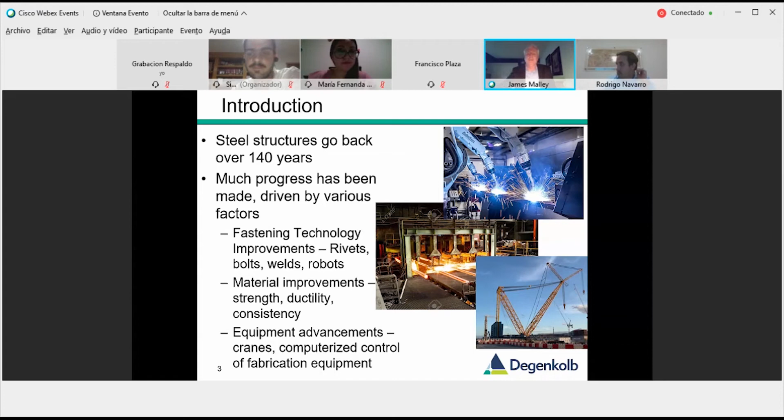And then there's equipment advances - I put a picture of a crane there. It's interesting how important the crane is to how the building gets built, and really it should be considered in how we design structures. Working with the contractor on the equipment they'll have access to on the project is also quite important.

Okay, so where can innovation occur? I mentioned 5 areas, so we'll jump right into the first one, which is architectural forms and design. Obviously architects are getting more and more ambitious.

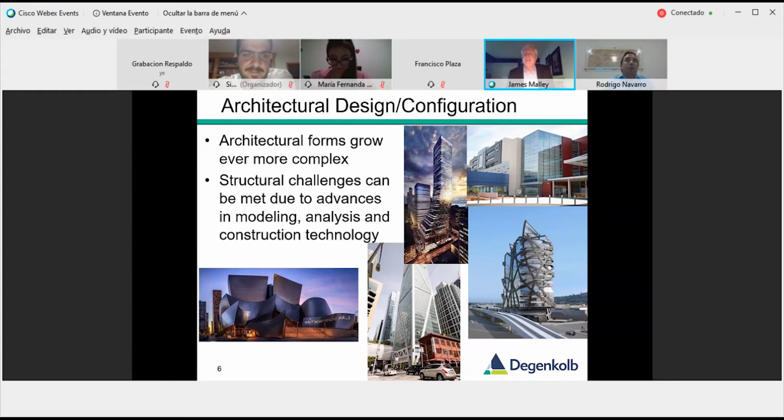A VA project that I designed will be the next slide - we'll talk about that as far as configuration issues. And then finally, a project that I'll talk about in one of my peer reviews at the end of the presentation.

So the VA hospital that we designed in Las Vegas is one building, one very large building, almost 1 million square feet. But it had various story heights or numbers of stories. The darker green sections were 2 one-story buildings, orange are 2 three-story structures, and then a seven-story structure in the middle.

If we had tried to tie this entire facility into one building or one structure, it would have been very complicated to design the lateral, the seismic system for that kind of building. So what we decided to do instead was to break it up into smaller, regular, rectangular shaped structures.

In the boxes here, hopefully you can see my cursor - you can see dark dotted lines where we broke the building up. So the intent there is that each of those act as individual structures.

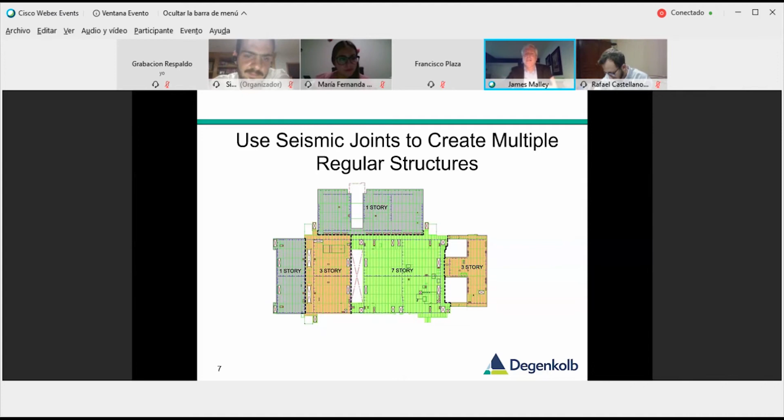So when the earthquake hits, here's a simulated earthquake for you, you can see the buildings will respond to the earthquake on their own and hopefully have much better performance overall.

So let's talk about systems. In our US building code, we have, believe it or not, 82 different structural systems listed - concrete, steel, wood, masonry, all kinds of different configurations and types. There's a lot to choose from. Really only a handful are used on major structures at the present time.

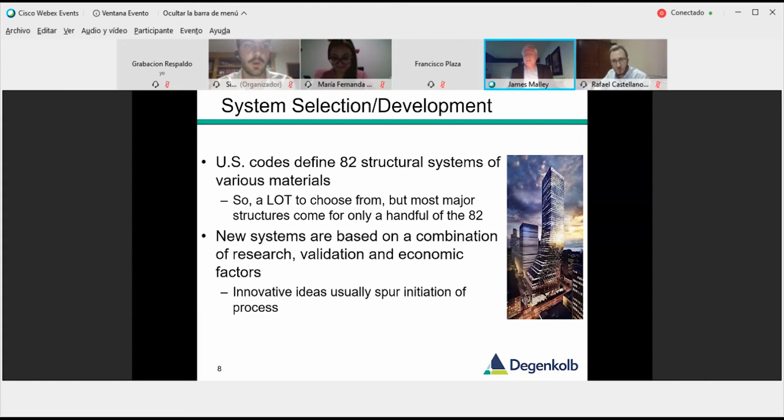So new systems are really based on a combination of research and validation through analysis techniques, and economic factors drive new systems. Engineers will come up with an idea, and it may lead to a new system eventually ending up in the building code.

So I'm going to talk about some of the more recent code systems that have been developed and added in the steel area. The first one is what we call steel plate shear walls. This concept was originally developed in Canada, and we have some Canadian engineers working on our committees who brought this forward to us to start to develop that system in the US.

So the idea is essentially to put a thin steel plate in the boundaries between beams and columns in a steel frame, and then it acts sort of like a shear wall, like we usually would think of in reinforced concrete, that can generate a tremendous amount of strength.

This is a test, a picture on the right at the end of a test at UC Berkeley years ago. You can see that the plate itself, being very thin, will buckle during the seismic response and orient itself in what we call tension field action, depending on the direction of the lateral load. It can be a very effective system.

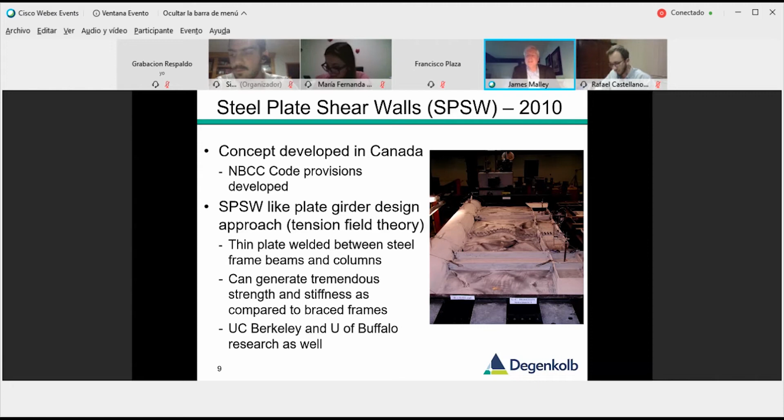I'll show you an example of one of those on a large project in Los Angeles later in the talk.

So designing those systems, usually it really is just a free body diagram for those of you in the audience - you can design all the elements to deliver the forces between the plate element in the middle and the columns on each side and the beams above and below. You can basically walk your way through the design of the building in that fashion.

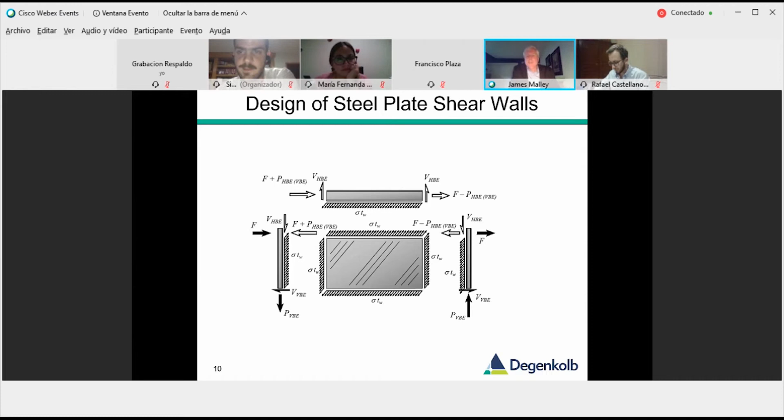One of the things we found in designing these steel plate shear wall buildings is that the plate thickness available to us just goes in steps, if you will. You might have a 1 centimeter plate, then a 2 centimeter plate, and a 3 centimeter plate available to you. Very often the plate thicknesses do not have to be very large - 2 centimeters is actually quite a large thickness for these plates.

The strength of the plate is obviously proportional to the thickness of the plate. So what we found was that when you design this system using solid panels, it can create very large additional demands on the columns in the building and the foundations. So some researchers developed an idea to put holes in the plate to reduce the capacity and tune it better to what the seismic demand on the entire building would be. This is an approach that's also available to us on steel plate shear wall design.

Another kind of system that we work with are composite systems, and I call it the best of both worlds, because we can use the steel where it is most effective - in tension or in shear, where steel is very ductile and has good strength - and then the concrete, primarily in compression, where concrete is really efficient.

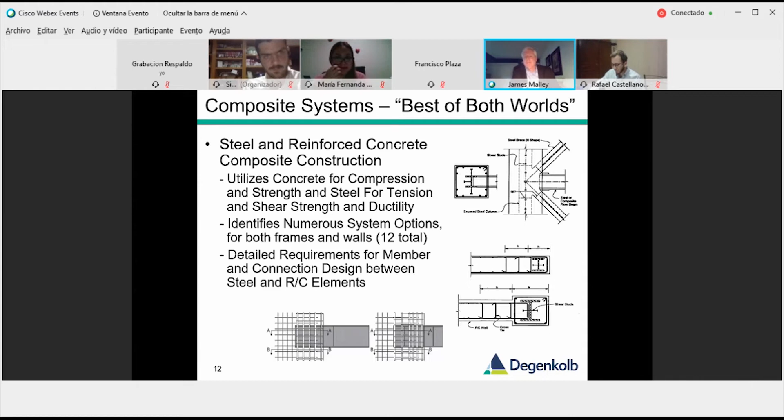So there are numerous options of that system. You can see some examples here where on the upper right, you've got a braced frame configuration where the braces and beams are structural steel and the columns would be a composite element between concrete and steel. At the bottom, imagine a concrete shear wall where you would have coupling beams between the wall piers, using a steel coupling member instead of a reinforced concrete coupling beam.

One of the very new systems developed in the US is called a composite sandwich wall. The AISC has dubbed this SpeedCore. If you wanted to Google SpeedCore, you would find a lot of information on this. This system was originally developed for the nuclear power industry in the US as a modular type system, but it's been passed over to traditional buildings as well.

The idea is basically to use steel plates, you can see at the bottom in the middle there, and then inside the steel box, pour concrete - not reinforced concrete. There's no reinforcing bars in these walls. There are tie bars, which you can kind of see in the picture at the bottom, closely spaced, usually on the order of 1 foot, about 0.3 meters, in both directions to keep the wall plates together. That acts as your shear wall.

Where we've seen this as potentially applicable is to replace reinforced concrete core walls in tall buildings, where traditionally the architecture or design would want steel framing for the floors, beams and columns, but then use concrete shear walls around the elevator shafts and stairs at the center of the building, for example in an office space. With SpeedCore, we can avoid the interaction between the concrete elements in the core and the steel elements, and just make it basically an all steel building.

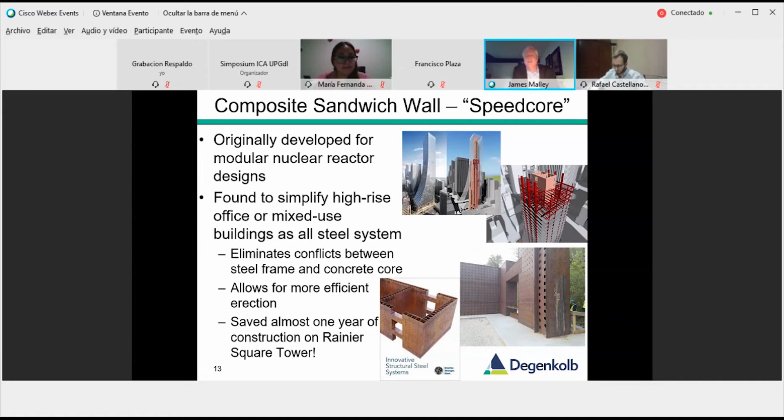That has some real advantages for speed, and that's why they call it speed core. On this example project done in Seattle, which I'll talk about a little later, they were able to save almost one year in construction out of a 3-year process. So it's very significant how fast they could build the tower. AISC is really pushing this forward for some of these larger projects. So that's kind of where we're at on some of the more innovative systems today.

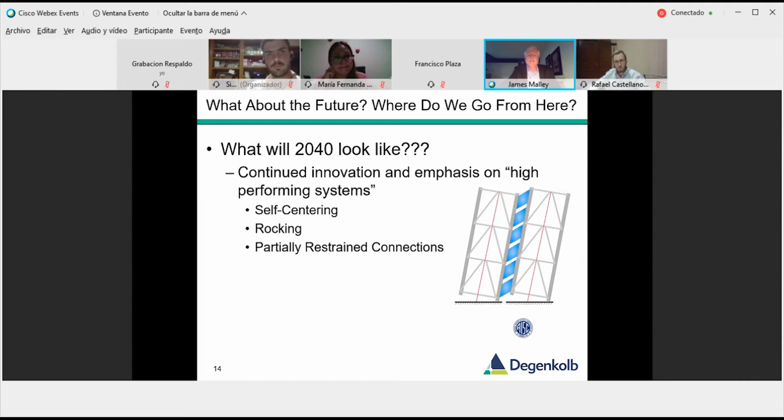But what do we think we're going to see over the next maybe say 20 years in steel? One idea that has come forward concerns how in our typical structural designs of all types, there's no real code requirement about making sure that at the end of the earthquake, the building has come back to plumb - straight up and down. Potentially you could end up with a building that's leaning after the earthquake, which would be very difficult to repair, so it might have to be torn down. So there's been movement in the profession to try and develop systems that are self-centering.

In our gravity systems, gravity will help to potentially self-center, but if we get very large earthquakes, it may not be able to do the total job. So what these self-centering systems use are post-tensioning, in most cases, to basically pull the building back to plumb and vertical. In the upper right, you can see a brace frame example with vertical post-tensioning between the red bracing on either side of the center of the system, in this area here and here.

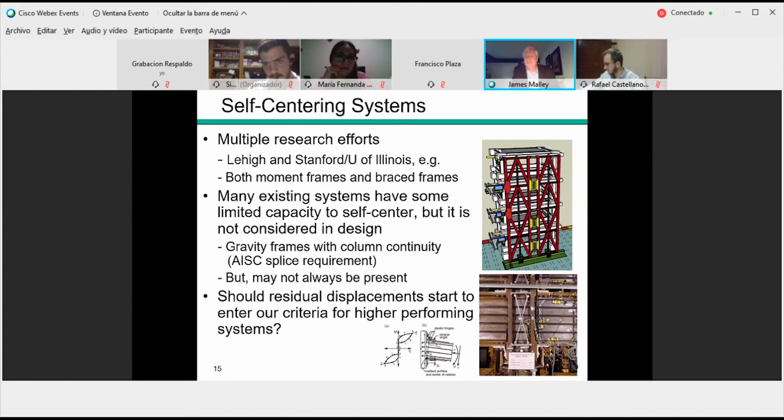So that's an element, a way to self-center. On the bottom part of the system is a moment frame system where we've got horizontal post-tensioning bars, again, that will do that pulling back or recentering the building after a major earthquake.

Another approach, which is a little less direct, is a rocking system. This has actually been studied for many years. There were tests done back in the 70s on a shaking table, where a steel building was placed without any connection to the table and allowed to bounce around and rock. You can imagine there is stability in the system just from the gravity that goes on. But really we don't have any rules in the code about how to do that. There's some work going on to try and develop those.

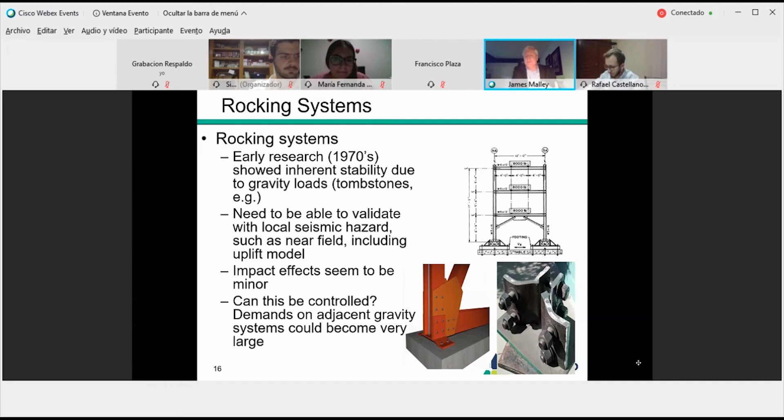Some engineers have been using systems like in the little graphics at the bottom there, with a piece of angle that's bolted to the foundation and then bolted into the braced frame, allowing those angles to rock, or the building to rock up off of those angles. But we really need to control that. So there's more work that needs to go on before something like this would be codified in any sort of fashion.

So the next step is partially restrained moment frames. That system isn't used very often in modern practice. Usually with our seismic systems, we want the connections to be stronger than the members, and don't want to get the ductility out of the system in the connections. But in the partially restrained design approach, we actually want the connections to be yielding, and we have to make sure we control the failure mechanism to be a yielding mechanism.

Okay, so we'll move on now to high performance products. Generally our building codes focus on life safety, with only limited emphasis on functionality and repairability after major earthquakes, except for critical post-earthquake facilities such as hospitals, which we really want to make sure are occupiable after an earthquake. Some owners are interested in making sure their buildings are functional or have limited damage after an earthquake - think about data centers, critical manufacturing facilities, or museums. Museums are an interesting case because the contents are potentially so fragile and expensive, billions of dollars, that making sure that building has limited damage and shaking is very important to protect the contents.

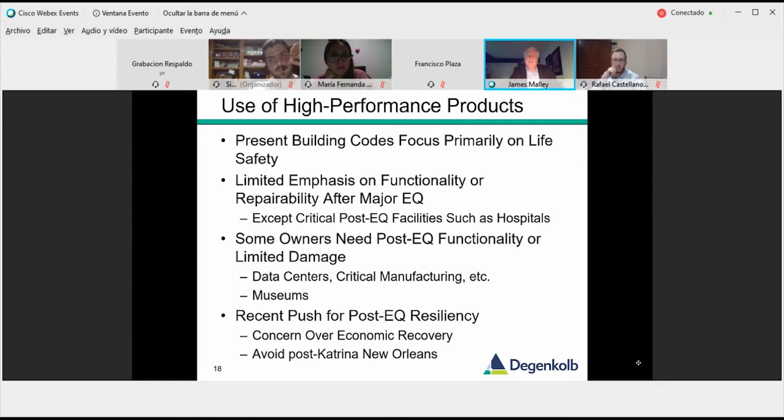In California, we've been talking about what we call post-earthquake resiliency recently, where we want to make sure our regions, if subjected to a major earthquake, will be resilient, and there won't be a disaster like which occurred in New Orleans after the Katrina hurricane. So that's another area where we might want to look at using high performance products.

Those generally are a couple of different things that we use: seismic isolation and damping. We call this response modification. Basically, those types of elements change the response of the building so that it reduces the demand on the rest of the structure, limiting any kind of damage that might occur, and dissipating the energy of the earthquake, taking the demands out of the primary structure.

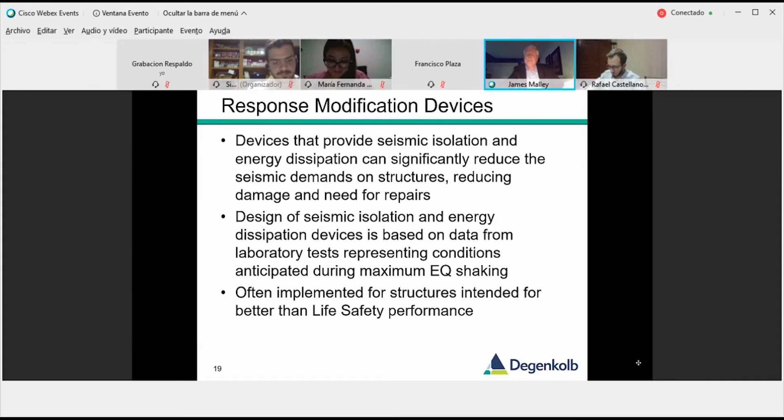Both of those require us to have a lot of data and information, laboratory testing on those special elements or devices. We really need to have a good representation of what we think the maximum earthquake shaking that's going to occur in those buildings might be. Usually, these would be implemented when we're going potentially beyond the code minimum or just life safety performance.

So an example of seismic isolation here. As we know, the ground shakes. If the building is attached rigidly to the ground, it has to take the motions of the ground. But if you isolate it, the ground moves, and essentially the building stays in place. A friction pendulum isolator is a very common system for seismic isolation.

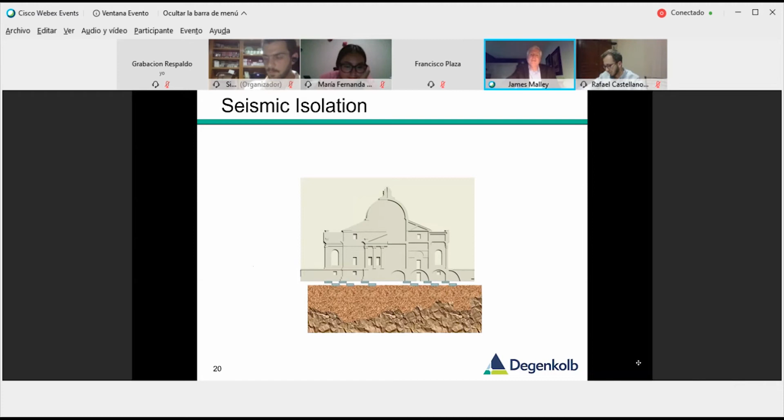So we'll talk about damping. You can get very good performance for high performing buildings out of dampers. It helps to reduce accelerations, to protect the contents, maybe not as much as base isolation does though. The cost increases are fairly moderate, a few percent of construction costs potentially, and it's actually getting pretty widespread application.

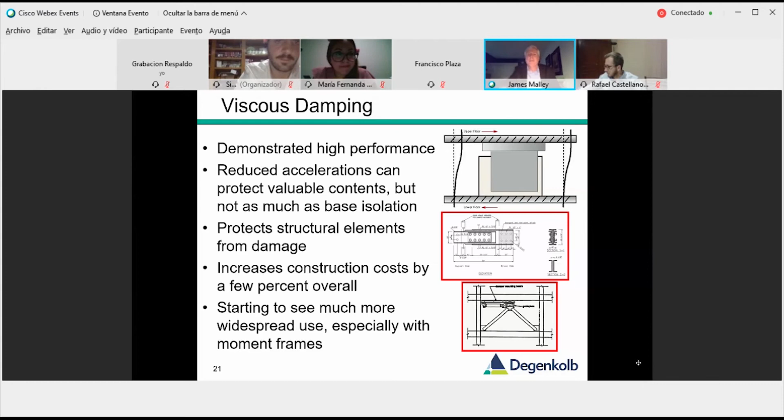So a little bit more on dampers. The upper right corner shows what we call piston dampers. These are very similar to shock absorbers in your car, used to limit the movement or the deformations. They can get very large.

The ones in the center graphic at the top were actually used on ships for missile launching, so that they wouldn't damage the ship when the missile launch went off. We don't use dampers quite that big in buildings, but we do get up to 500,000 pounds of force in some of these dampers.

And the bottom part of the graph is what we call a wall damper system. You can see on the lower left there, this is what the graphic looks like in the center. The idea here is that you have a steel box filled with a viscous fluid, and the viscosity of it has been kind of likened to cold peanut butter, like when it comes out of the refrigerator. That box is filled with that fluid, and it's connected to the bottom of the story.

Then a steel vane is placed down into the fluid, and that vane is connected to the top of the story. During the earthquake, we get drift or motion between the two floors, and that pushes the vane through the sticky peanut butter and dissipates energy in that way. So it's a very slick sort of system.

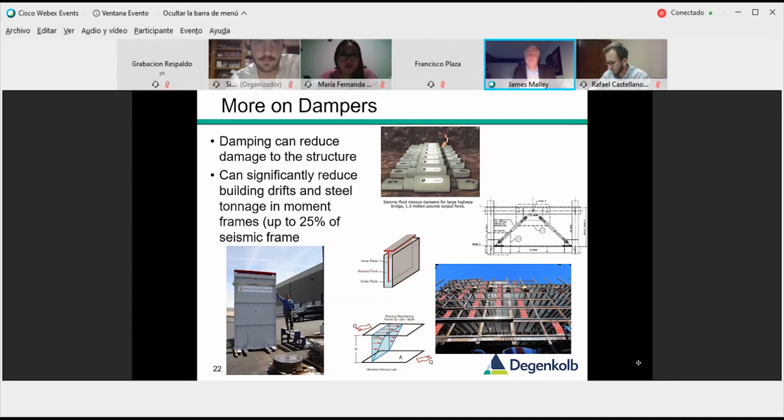We implemented it on a hospital in San Francisco on the lower right there. First time it was used in the United States, and it worked out very well. It actually saved money, almost $10 million in the construction costs of the hospital over a standard steel frame building.

Another system that we use, a modification device, is called a buckling restrained brace. You can see the graphic here at the top, and I've got a little demonstration here with a straw. In a regular brace frame, when we put the brace in compression, we buckle it over the length. Hopefully you can see that here.

But if we restrain it - I'm going to try and restrain this one at the center point - the capacity of that brace goes up dramatically. In the buckling restrained brace concept, you basically put the brace inside a retaining tube, and you can push it so that it will have the same capacity essentially in tension as it does in compression, because it's not allowed to buckle. That makes it a much more ductile brace.

If you have a regular brace and you cycle it a number of times, after a few cycles of large compression and buckling, we'll often lose the capacity of that brace. This is a much better system. It's very widely used in the United States now on major buildings.

And there's some additional concepts of what we call the strong back, where you combine these buckling restrained braces with a stiff spine to get excellent seismic performance.

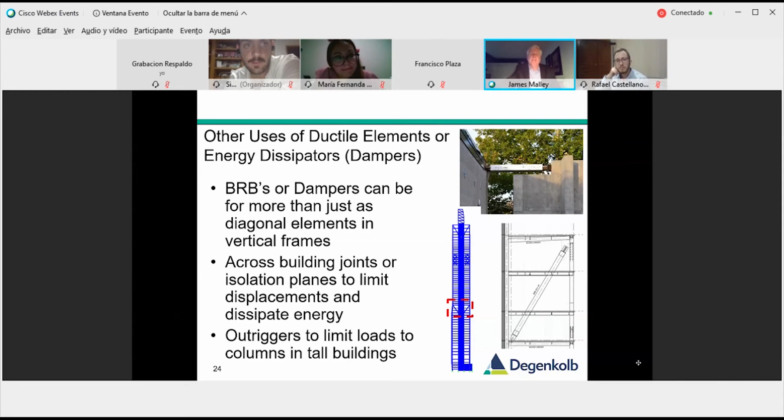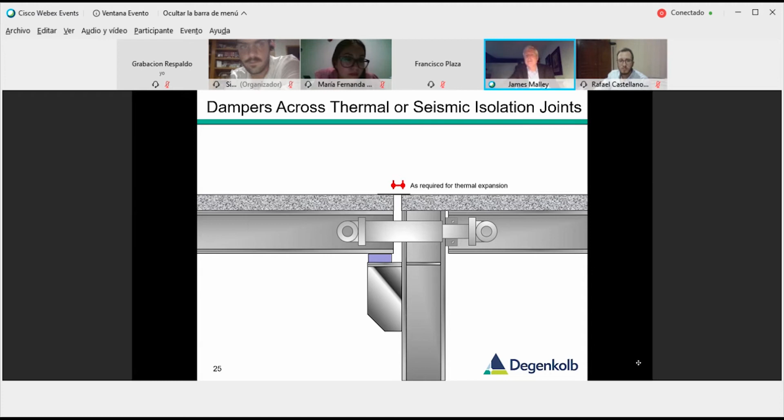So here's one where we've got a damper element across a seismic joint, and when the earthquake comes, you can see motion back and forth that pushes, and that will dissipate some of the energy and help, as well as help the buildings from pounding together. So this is a way to have smaller seismic joints as well as some energy dissipation.

The outrigger idea - this is a good example of this. Another project that I peer reviewed was the Wilshire Grand project in Los Angeles. The lateral system on that building in the short direction, the transverse direction, was just the depth of the core. The ratio of the height of the building to the depth of the core was on the order of 15:1. High-rise designers will tell you that's not going to be a building that works, because it's going to be very susceptible to wind motions as well as earthquakes.

So at that point, you go to what we call an outrigger system, where you grab onto the perimeter columns of the building with these diagonal outriggers. In this case, we had three sets of them because the building was so tall. It essentially gives you a wider base to resist the seismic motions, and that creates a much better response of the building, changing the period down from 11 seconds to 7 seconds, really making the lateral system much more efficient.

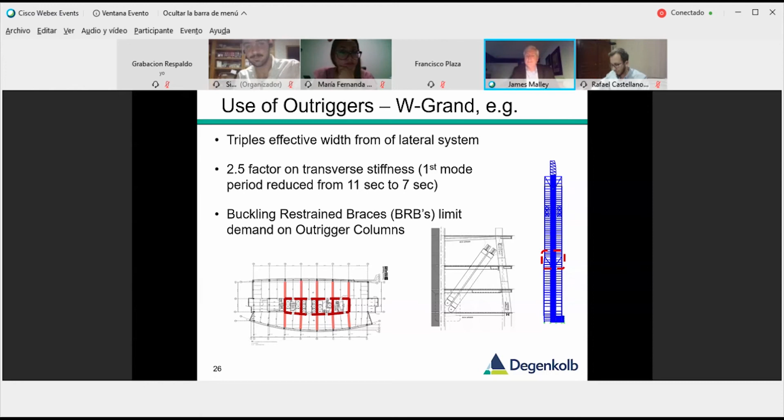In that same building, we used belt trusses around the perimeter of the building. You can see those graphically on the slide with the red box. That basically grabs essentially all of the gravity load of the building to resist the overturning moment from either wind or seismic forces. It makes good use of the steel, reduces the amount of tonnage, and reduces the demand on the foundation.

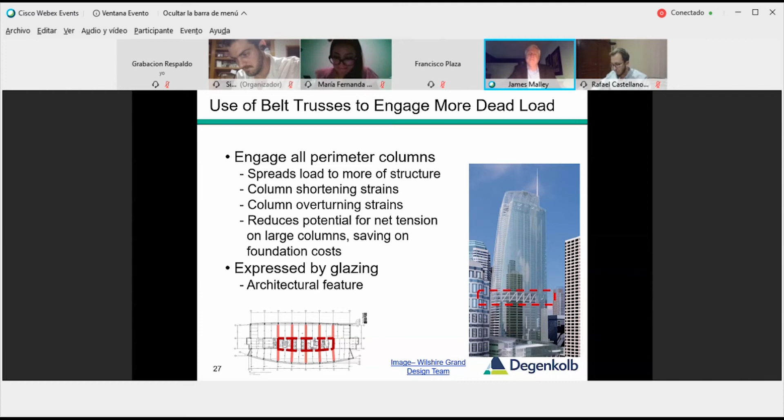Another neat element we can use on projects now is a composite floor system element called SPS. This was developed in Canada. Almost all steel frame buildings in the U.S. have floor diaphragms or floor slabs that come from metal decking with concrete poured on top and reinforcing steel. In this case, it's a composite system with two steel plates with a polyurethane elastomer core in between, which spans to the beams in the floor system.

So you wouldn't have any concrete for the flooring. The elastomer provides sound control and vibration control. It's been used in a couple hundred projects, in a number of buildings and bridges, as well as a few stadiums in the United States.

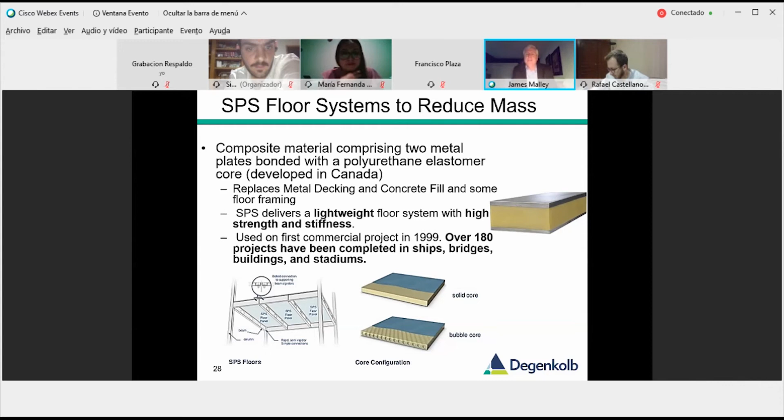So another idea for products or specialty elements is multi-component braces. This is from another peer review that I did, and I'll show more about that later. The braces in this building were connected to the structure only at 18 floor increments. It was a 54-story building, with 3 braces on each side of the building.

What the engineer did was put a buckling restrained brace at one end and a damper at the other end. The damper was there for wind control, because there were condominiums at the top of the building, and the owners would get seasick in decent sized windstorms without additional damping.

But for the seismic response in a major earthquake, those dampers will lock up, and then the buckling restrained braces will yield and dissipate the energy. So, a very interesting type of approach on a unique project.

Okay, so let's talk a little bit about structural analysis, and some advanced techniques we have for capacity design, nonlinear analysis, ground motions, soil structure interaction, and some modeling techniques.

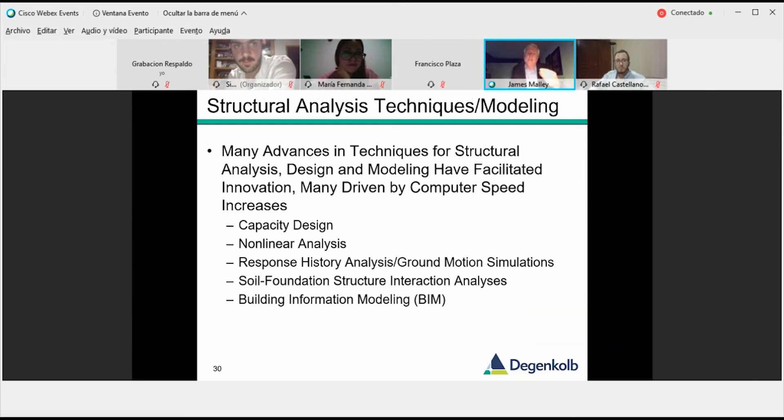When we talk about capacity design, what we're interested in is using fuses in our building to limit the amount of force that goes into the building in an earthquake. This is similar to what happens in a residence with your electricity.

In your fuse box, you want the amperage of the fuses to be less than the amperage of the wire, so that you don't overload the wire and the fuses blow, but not the wire—which, if the wire blew in the system, you might burn the house down.

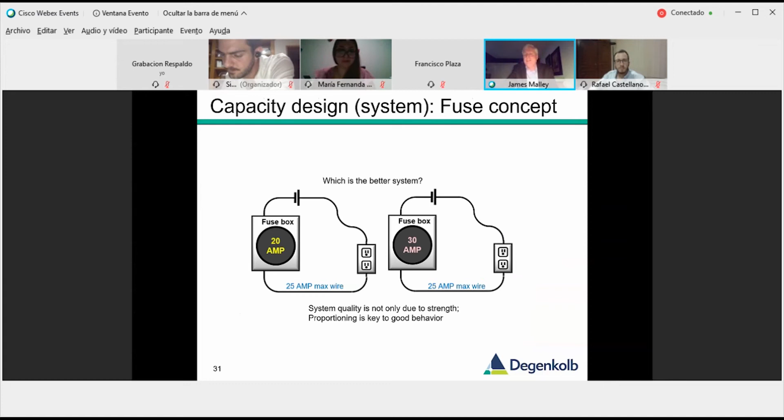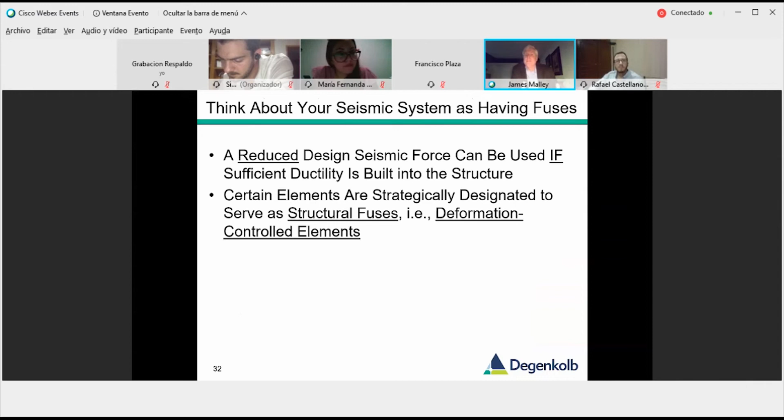Similarly in earthquake design, we want to have fuses in our building to reduce the design force and build ductility and deformation into the building with elements like those buckling restrained braces that can dissipate a lot of energy. That's the concept of capacity design.

Once we know the strength of those buckling restrained braces, we design the beams, columns, and foundations to be strong enough to make sure that's the yielding element in the system when the earthquake hits.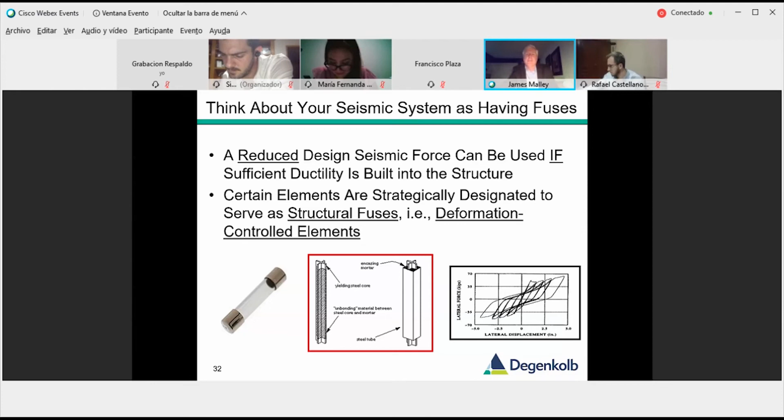A lot more nonlinear analysis is used these days, a lot of it on tall buildings. That gives us a much better understanding of the performance of the building than our typical linear elastic type of analysis techniques.

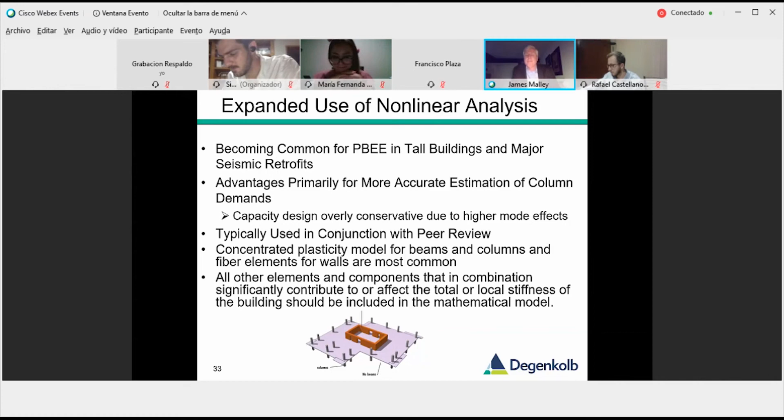There are a lot of ways to model these, and when doing a nonlinear analysis like this, any element that provides stiffness to the system needs to be incorporated into the model. There are various options for modeling the nonlinear behavior of the elements in the system.

For response history analyses, we now often put simulated ground motions into our models. Whenever we can, we use recorded motions that match a response spectrum, shown in the graphic on the lower right. When we don't have ground motions that simulate what we think the building might be subjected to, seismologists can use techniques to simulate those motions. One approach where this comes into play is in the Pacific Northwest, where we have the Cascadia subduction zone.

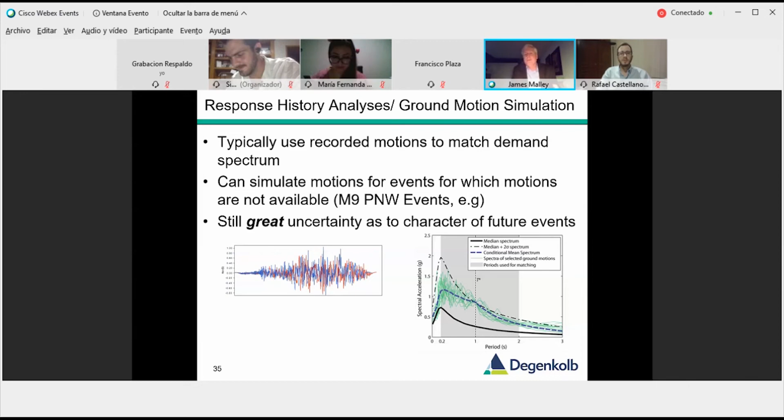Just want to note that there's a lot of uncertainty in our characterization of ground motions. So we run multiple simulations, oftentimes potentially 20 or more ground motions through our models to try and understand the performance.

Something else that we sometimes use is what we call soil foundation structure interaction analysis, shown in the graphic on the right, where we might develop stiffness springs to represent the soil that surrounds the foundation of the structure, and then shake the bottom of the rigid box and use the stiffness of the soil to interact with the superstructure to get a better approximation of the performance of the building.

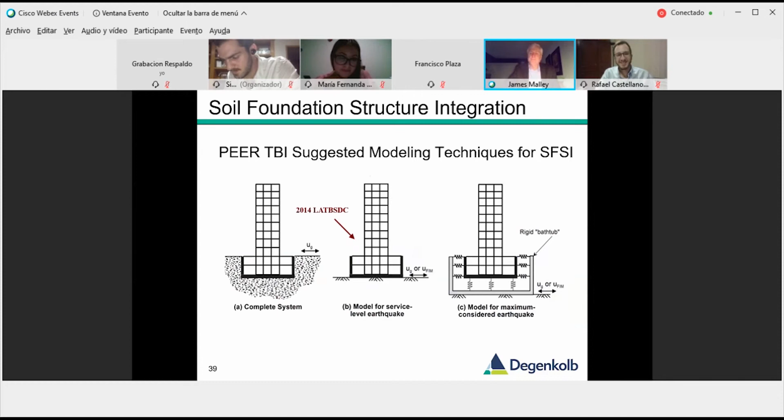BIM modeling is building information modeling. I think there was another presentation on this at the conference. It's something we're doing all the time now, and it really gives us the opportunity to work very closely with the fabricators and erectors of the steel buildings, to make sure that our design techniques and the way we model them in the computer is consistent with the way they're going to build them out in the field. So it really gives us a great way to work in close context with the contractor that's going to build the structure.

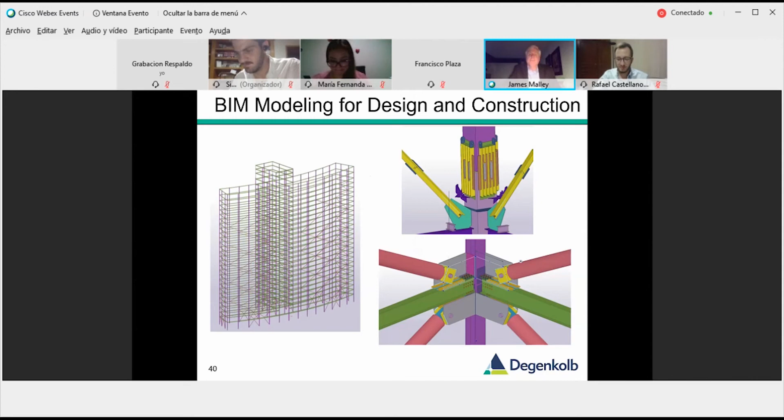So let's talk about connections. Obviously very important for the performance of the building, so we really want to make sure that generally the connections are stronger than the members, as I said before. We now are pre-qualifying connections based on testing and research to make sure that we understand what the performance is going to be.

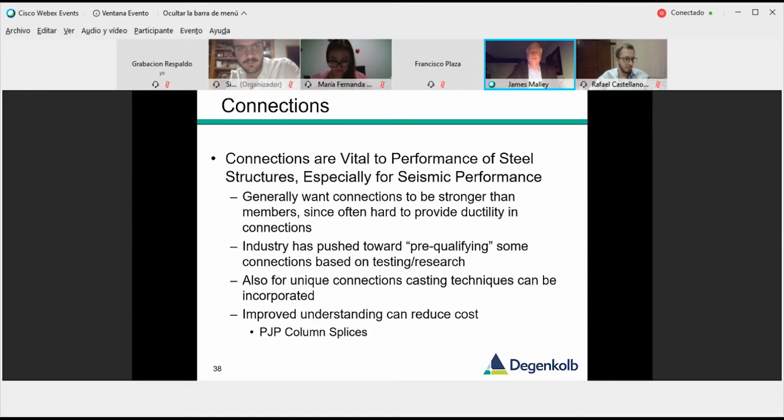We also sometimes use castings for very unique conditions, and I'm going to talk about a special case of column splices.

On this conformance demonstration for pre-qualifying these connections, we start out with developing some test specimens that simulate the conditions of the connection, and then build a test setup like in the lower left, put it through a lateral or cyclic force or deformation procedure as shown in the upper left, and then we get the response down in the lower right.

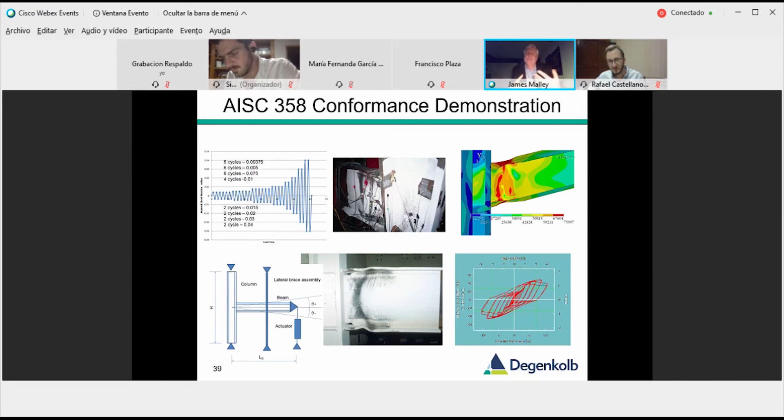We also need to simulate the performance in our computer using what we call finite element analysis, and you can see a comparison to a test and a model there. So those things all go together to help us write the rules for these pre-qualified connections.

There's a number of them in our AISC standards. There are a couple that are what we call proprietary, developed and patented by a company. One of them is SidePlate. If you wanted to use this connection, the fabricator would have to pay a fee to SidePlate for this technology. A similar one is what we call ConXtech.

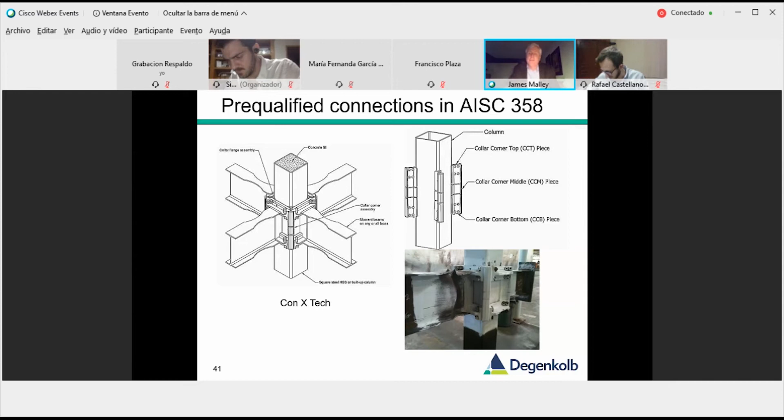This uses tube columns that are filled with concrete, and then brackets that are bolted to the four corners of the tube, and another bracket that's welded to the end of the beams that frame into the connection. Everything is bolted together in the field, so there's no field welding in this detail. There's a connection test result at the bottom. So that's another proprietary pre-qualified connection.

On castings, the idea here involves a couple different applications. On the lower left is a very unique structure in San Francisco, a transit center that had some very long span, very large, almost like offshore platform type construction. In this case it was very repetitive because the building is over 1,000 feet long.

So the contractor decided to go to a casting company that would make molds of the steel that they needed for these connections, and then cast them, bring them to the site, and use that as part of the connection between the major elements of these trusses.

Another option for castings is the connection element itself. In this case it would be this part of the system where you would have a tube brace, a circular brace. There could be a catalog of these depending on the size of the brace as to what the capacity of the connection needed to be, so you could use the catalog and just specify that for whatever size brace that you have.

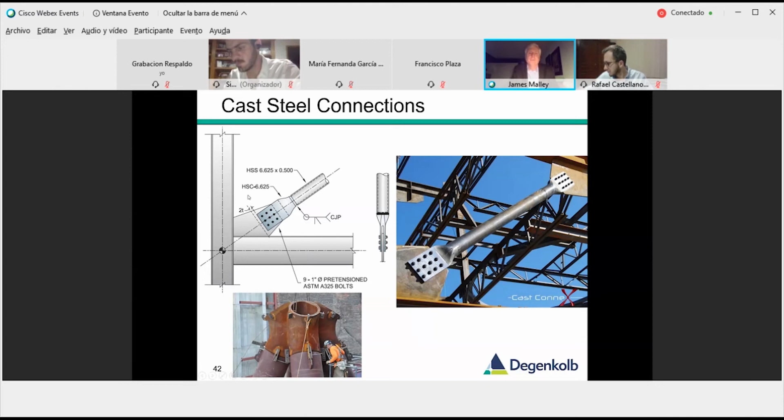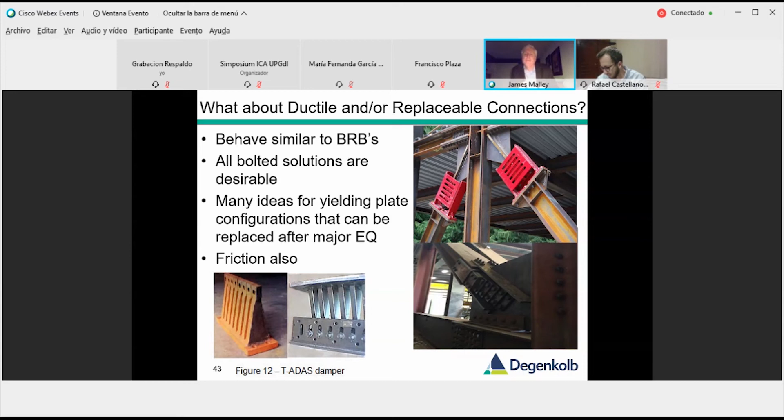There's also castings and other ways to make what we call replaceable connections. The idea is that after an earthquake, this connection might have used up all of its energy dissipation capacity, but we could then unbolt it and bolt in a new replacement brace for when the next earthquake might hit. There are various configurations here - some use yielding of plates, like in the lower left, but the one in the lower right relies on friction between various plates in the connection setup.

Partial penetration welds in column splices can be a challenging thing for engineers. In our standards, we primarily want to use complete joint penetration welds for these, to make sure this is a very important connection that keeps stability in the building during an earthquake.

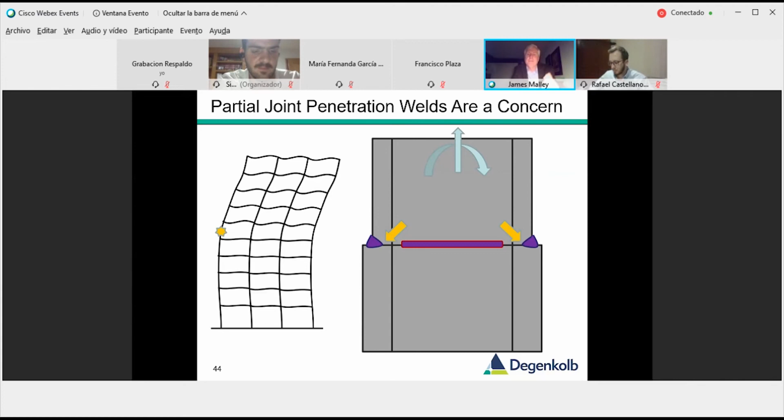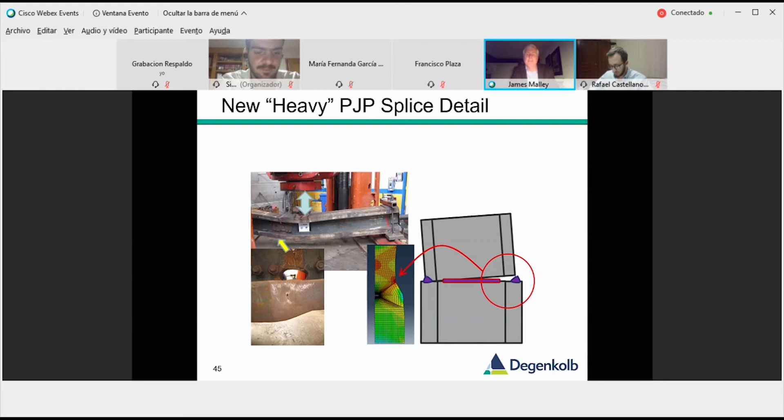So some research was done on this, both analytically and in a laboratory, to develop what we call a heavy partial joint penetration splice detail that can give us similar performance to a complete penetration splice. So another kind of innovative detail for a connection.

Let's talk for a couple minutes about existing steel structures. Generally, steel buildings have performed pretty well without any collapses, but we did have the Northridge earthquake that did damage we weren't expecting, which really led to a lot of research and testing and the like, that then led to a lot of innovation and new tools for us. When we work with existing buildings, we're dealing with some of these fracture issues found in the Northridge earthquake, and the modeling therefore becomes much more complicated than it would be for our new building designs with ductile connections.

So some slides from the Northridge earthquake. I'm in the dark here, aren't I?

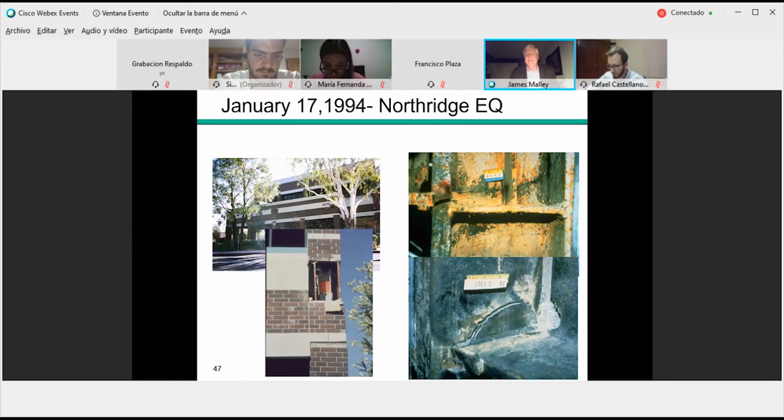A lot of buildings had fractures. You can see in the graphics here fracture through a column almost to the other side of the column where the beam flange pulled away. Here's a piece where a piece of the column flange pulled away with the beam flange. One building was torn down here on the left, which was a low-rise building, but it did have that residual displacement I was talking about before, about 4 inches in the first story, and basically the building had to be torn down because of that. So we're trying to avoid those sorts of things.

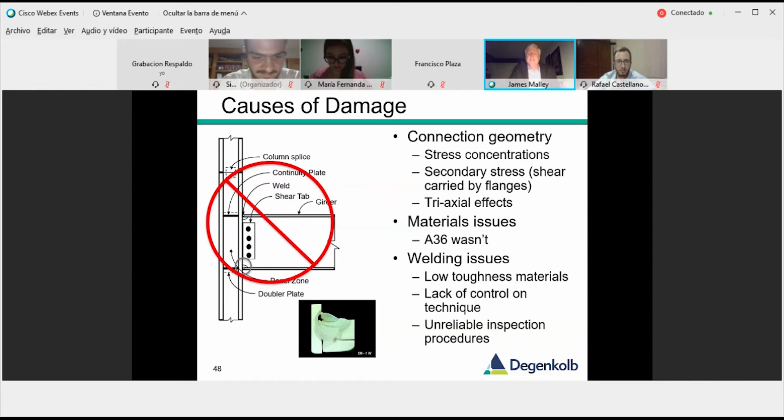So what we found in studying this connection that was very commonly used, now called the pre-Northridge connection, is that it had a number of problems. The connection geometry was not the best, and it created very high concentrations of stress and strain demands that would lead to fracture. We didn't really have good control over the material properties at that point in time, and there were issues with the welding procedures - the toughness of the weld material wasn't controlled, though now we have much tighter control on that. The techniques and the inspection were also kind of lacking, so there were a lot of changes that had to be made on these steel systems that came out of the Northridge earthquake damage.

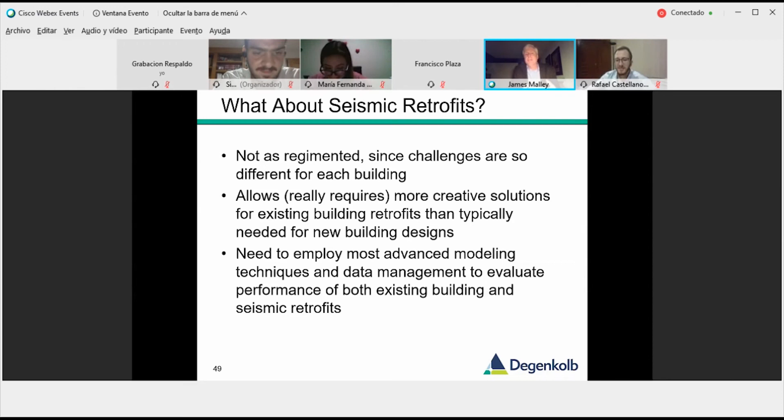So when we talk about retrofits, we really do have to be very creative, because we're looking at existing construction - we have to work with the parameters that are already in the building. It's not like new design where you can work with the architect to come up with the best structural system. You're going to have to really use advanced modeling techniques to try and capture some of these situations.

So the buildings are quite sensitive to ground motion. In the acceleration records, what we found, because of the fracturing, these are 5 different ground motions. You can see on the left for the same building, theoretically for the same size earthquake, and on the right the difference in displacement. One of the buildings on the lower right was probably pretty close to collapsing, whereas other buildings didn't have much damage at all. That's all just because of the difference in how the ground motion hit the building.

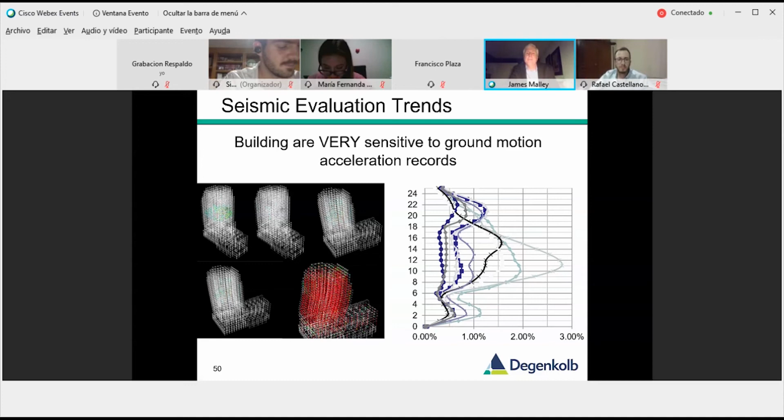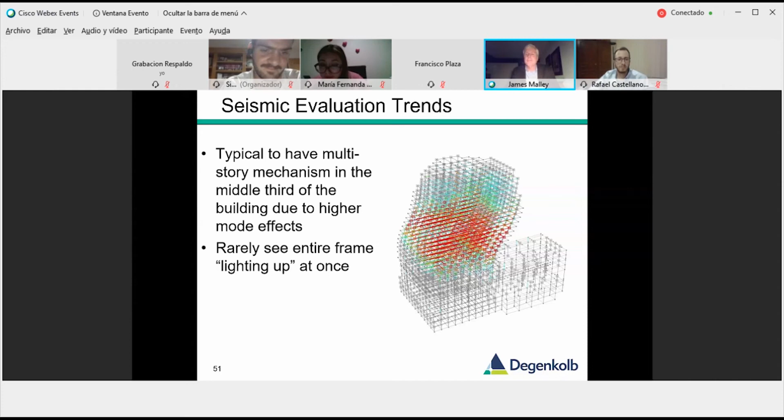We also found that in many cases, the demands on the building do not go over the entire height of a taller building, but really focus themselves over maybe 10 to 12 stories. And that focusing is where we could really have some problems with the fracturing of these connections.

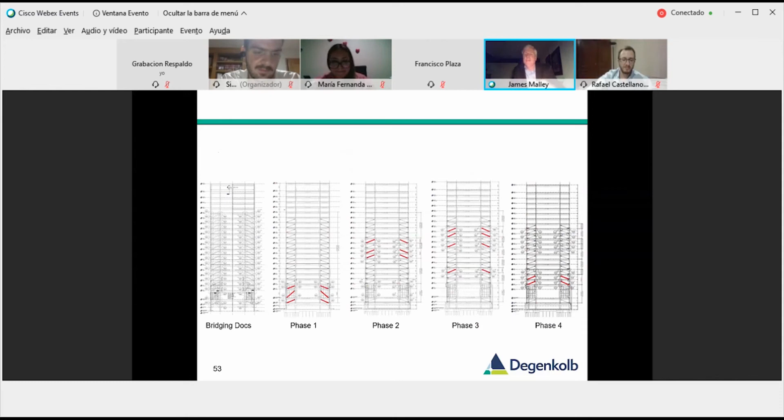This is a retrofit graphic of one we're about to complete in San Francisco. I put this in because it was very interesting that the owner had us do 4 separate phases where we added viscous dampers and did connection strengthening. Rather than starting from the bottom and going to the top, the owner didn't have control over the office space and when the tenant leases would be up and they'd be changing tenants. So they wanted to hopscotch up the building when they had the opportunity to get in and do the work. We were able to convince the city of San Francisco that the building was getting better and more seismically resistant at every step along the way. So we actually had to analyze the building for each phase of construction that occurred over the last 5 years or so. It's kind of an interesting approach.

Let's talk about codes and standards. Generally, the building codes are quite prescriptive - they tell you how you should design a structure to just meet the intent of the code. In some ways this stifles engineers from innovating, but there is language in the code that allows us to demonstrate equivalent performance without using all of the prescriptive requirements. This is some of that language: an alternative material, design method, or construction shall be approved when the building official finds that the design is satisfactory and complies with the intent of the code. That's sort of general language, but there's no guidance in the code on how you do this.

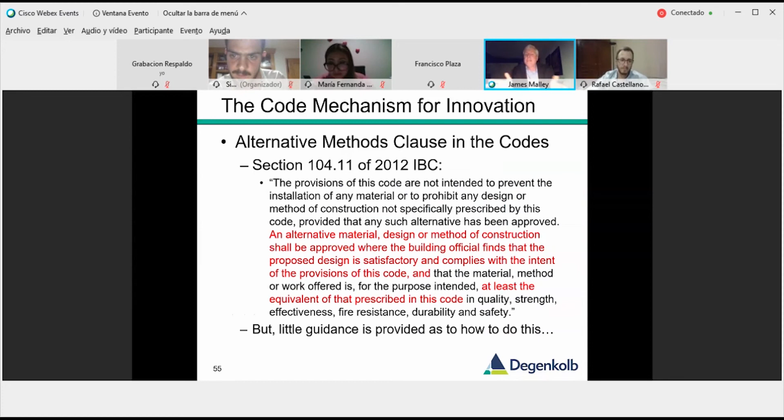So what has happened in the US is the development of guidelines for what we call performance-based seismic design. There are a few of those out there. The 2 most common are the Pacific Earthquake Engineering Research (PEER) Tall Buildings Initiative guideline, and the Los Angeles Tall Buildings Structural Design Council guideline.

Performance-based earthquake engineering is being widely used on these projects, as well as in design of new tall buildings. It requires nonlinear response history analysis, and also what we call peer review, because when you do something innovative, it's not 100% sure that the engineer isn't going to miss something in the design. So having another set of eyes - another expert in the field - review the project gives the building department confidence that we are getting at least equivalent design, if not better.

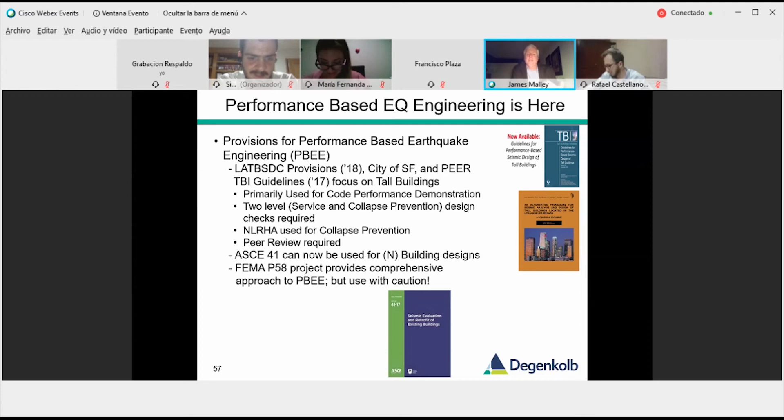So let's move on to example projects. I'm getting close to the end of my time, so I wanted to go through a few of these to demonstrate some innovation that's gone into a lot of tall buildings and complex buildings, usually all three. As I mentioned, peer review is used on all these.

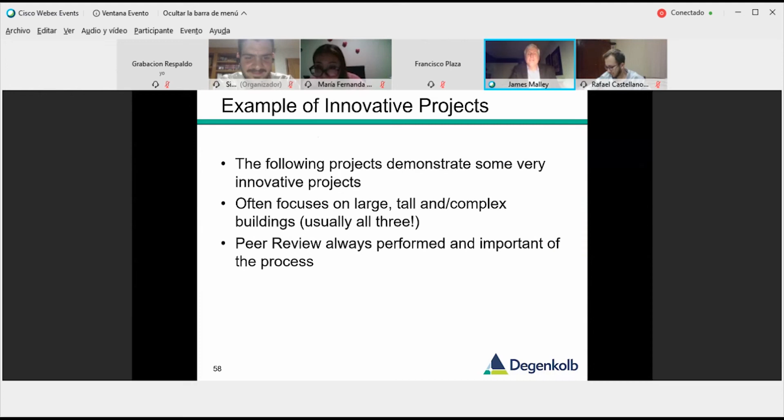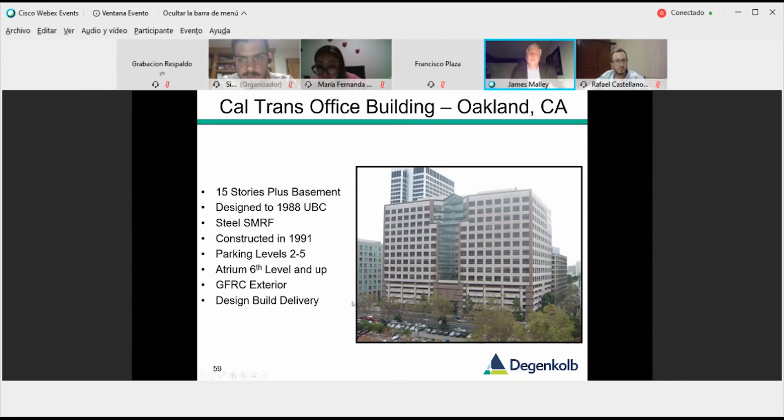The first one I'm going to talk about is a project where I was the engineer of record, in Oakland, California. It's a retrofit of a 15-story building, one of these pre-Northridge moment frames, for the California Department of Transportation. It was built just before the Northridge earthquake, so it has those vulnerable connections.

The building is occupied by a large number of engineers - bridge engineers, not building engineers - but they were aware of what happened in the Northridge earthquake, and they got some money together from the state to do testing of the connections used in that building, because they're quite large, much larger than any of the testing done in the research right after the earthquake. What we found was not very good performance, some fractures in the connections, and not very much energy dissipation. So that's what led to this retrofit project.

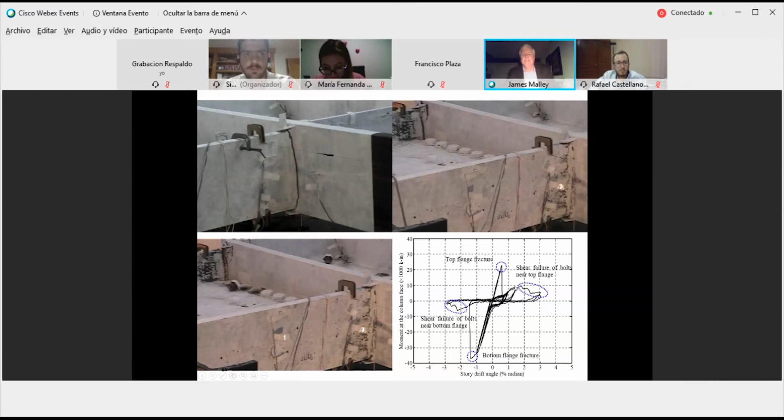So when we got this commission, we looked at four different schemes using the kinds of techniques that I talked about earlier. One was fixing the connections. One was adding dampers and fixing connections. One was a whole new lateral system using buckling restrained braces. And the fourth was a base isolation approach.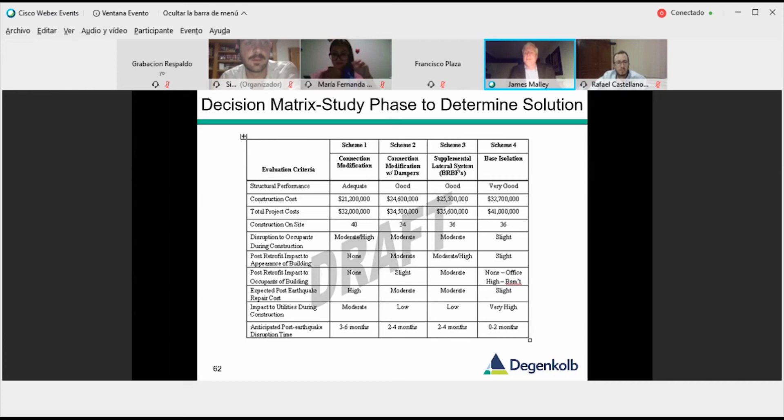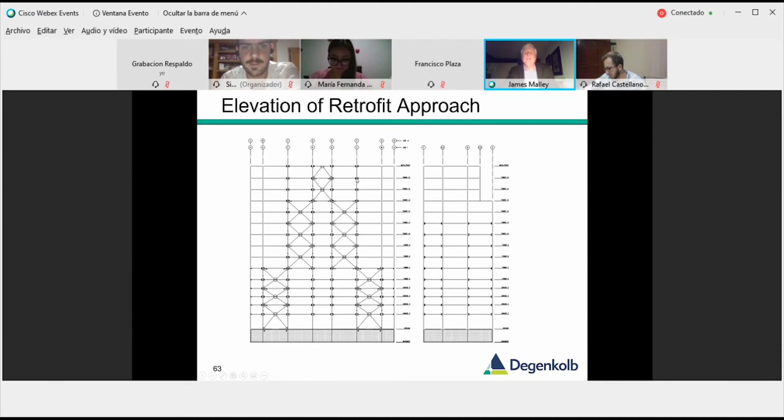We went through a decision process with the owner and came up with a connection modification, and dampers being the best approach. So this is a graphic of how we did this. The diagonals now are the dampers that went in, and you can see connection retrofits wherever you see those bold things in the elevation.

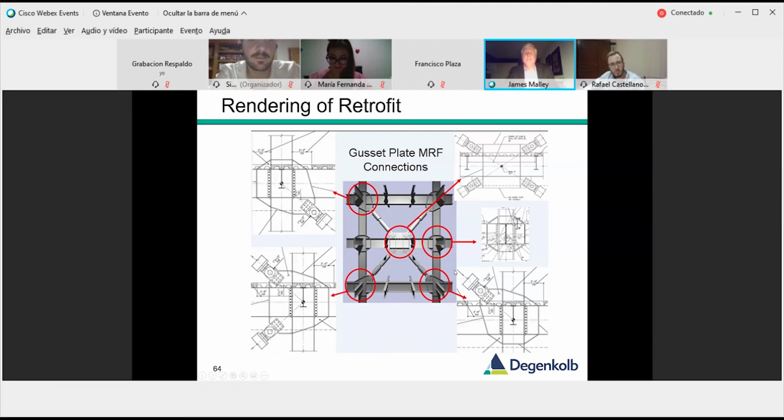So we had to simulate in our model these existing connections that were fracturing in those test results that I just showed. We use what we call a fiber model, where we would put a fiber, kind of like a string, at the location of the beam flanges, as well as one at each location of the bolts. And then we tune those capacities to be similar to the capacity of the member.

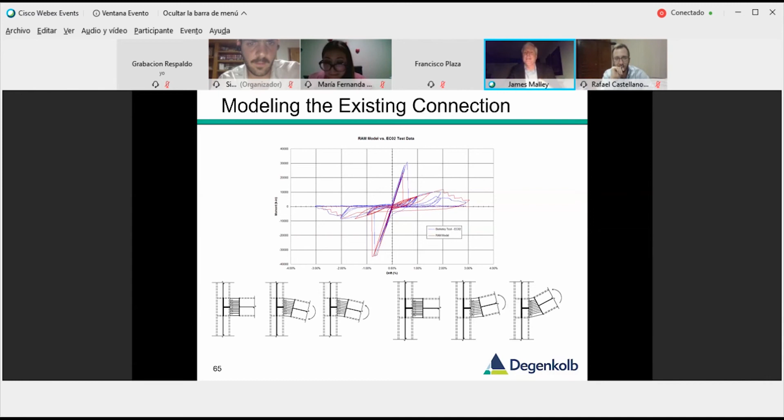We simulated both the initial welding of the connections together, as well as the retrofit welding on the right-hand side. Because the frames are along the perimeter of the building, we only had limited access on the outside next to the curtain wall or the glass for the edge of the building.

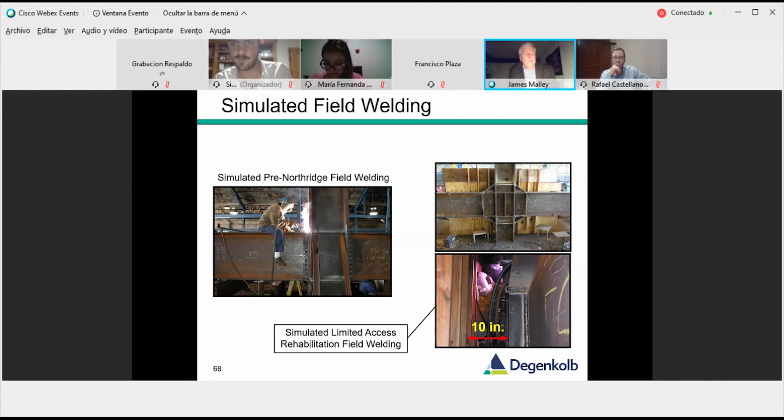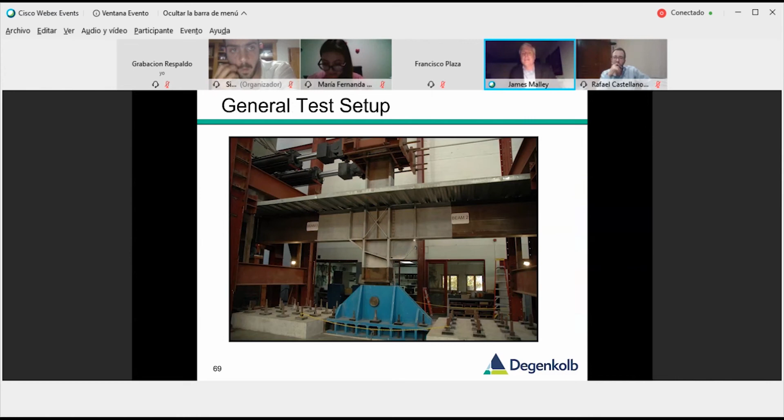So then we simulated that welding at a test setup at UC San Diego, a full-scale test where we pushed across the top, and then tested the connections. We also did finite element analysis to simulate, and our tests and the model simulated quite well, so we felt very good about our analysis technique.

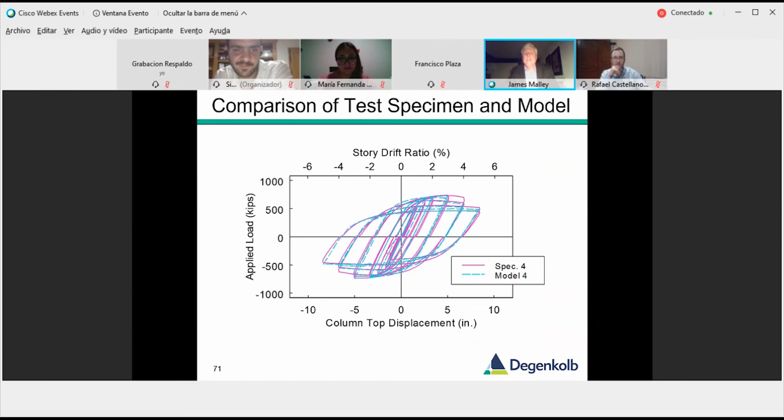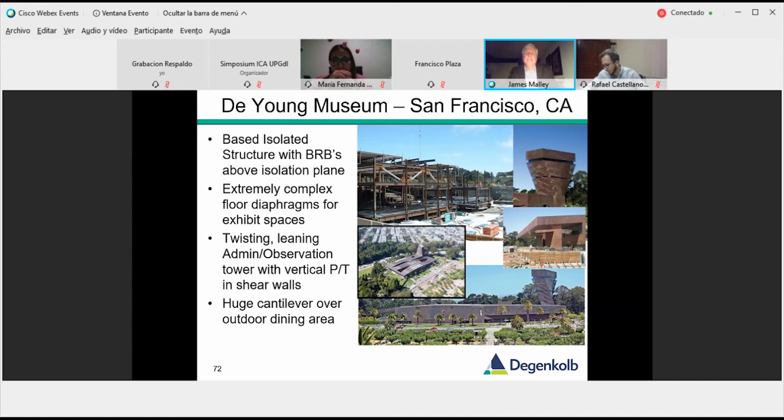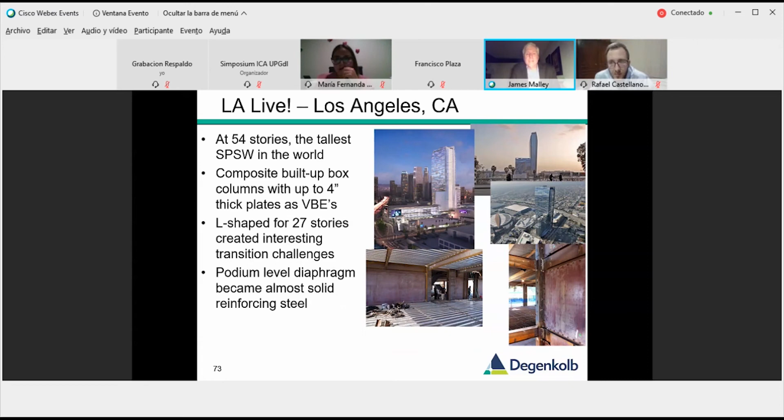This is the very tall steel plate shear wall building in Los Angeles that I mentioned. This is the tallest of these steel plate shear wall buildings in the world, with very large box columns and very thick plates - a very complicated design to review and look at.

This was that project in San Francisco with the exterior bracing, three giant diagonal braces on each side of the building. One of the other interesting things the engineer did was to allow some uplifting at the corner columns in the very largest earthquakes, to reduce some of the demand on the foundations. There was a mechanism to control that in their design.

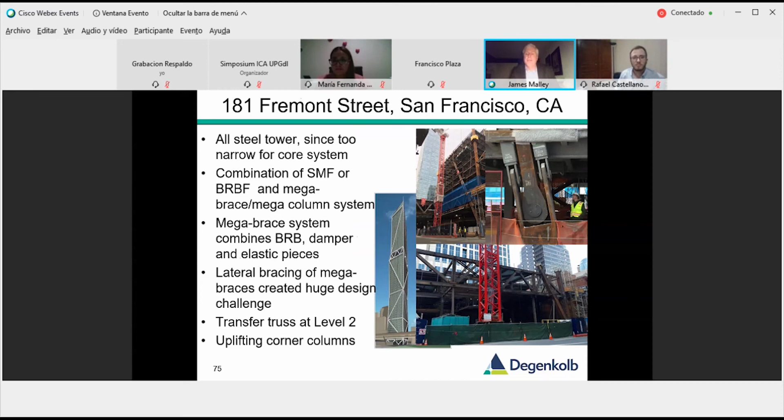There's the project in Seattle, the Rainier Square project that I showed with the Speed Core system. Again, a very exciting new project to implement and see the results and the speed that the building was able to be built with.

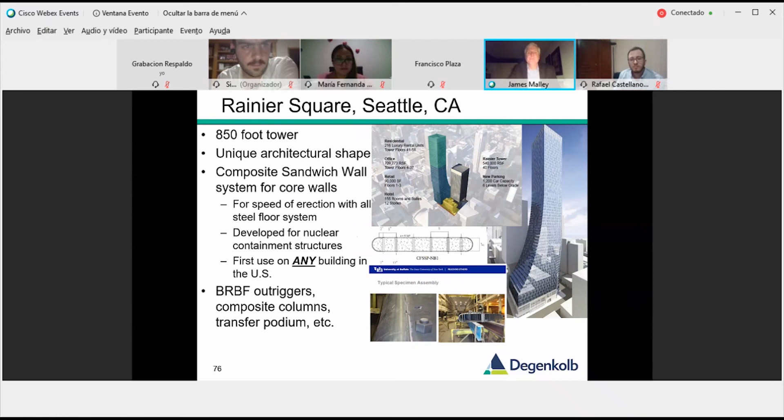Here's the last of the examples. This is a quite different building, being built right now near the Los Angeles airport, about two miles from a major fault. Basically it's called a wrapper because these steel boxes sort of wrap the building, kind of like the bird's nest in the Beijing Olympics stadium. We were lucky to convince the engineers that base isolation was really the only way they were going to demonstrate this building would ever work. It's under construction right now, so it'll be very interesting to see how that does in a future earthquake.

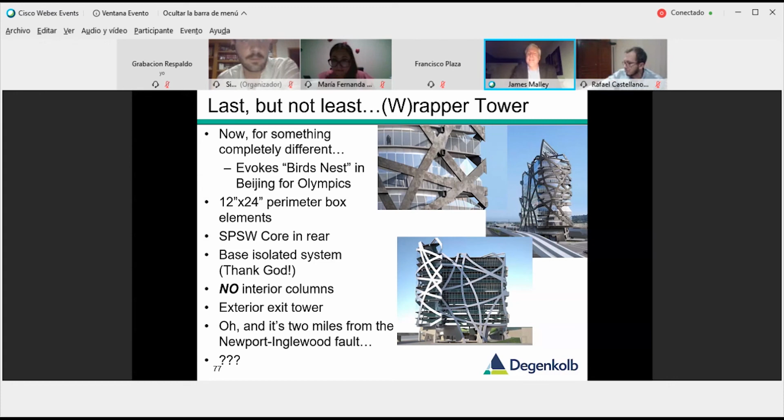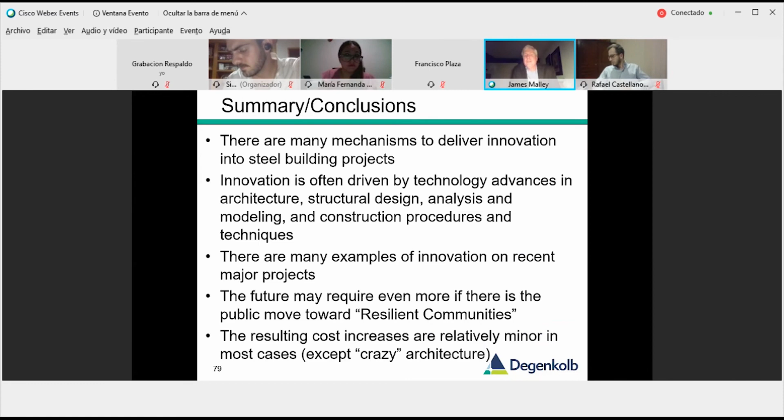So there are lots of ways to deliver innovation on steel projects, driven by technology and many other factors. Lots of examples on recent projects, and hopefully we'll move toward resilient communities. Usually the additional costs of doing these sorts of innovations are not too bad, except if you get into very unique architecture. So with that, sorry if I went a little over, but I thank you for your attention.